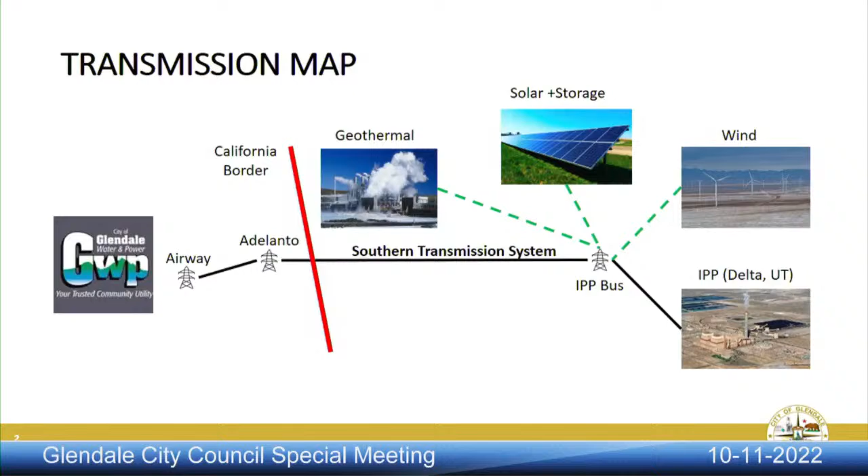So for that one, I believe we would still use the existing transmission line for Glendale. We will have that 55 megawatts, and not until 2027 would we have the full additional 72.

So that increased share we get, we don't really have access to until 2027. And then, I've read that the plans are that IPP is going from coal to gas, right?

It's coal today, they're going to gas, but 30% will be hydrogen. Is that still the plan? In 2025, are they going to be producing 30% of that energy using hydrogen? That is correct, that is still the plan and we're working towards it. There are a lot of hurdles, but that is still the plan.

Okay, that's what they're doing. We're not really directly part of that, right? Except that we're a purchaser, a shareholder. Yes, that is correct. Okay, but that's the plan.

And then one other thing on this is, so we get the Hoover Dam, we get a lot of power from that. Where is that coming into this picture? There's another line here, this is just the southern transmission system.

So we do have access to a different transmission system from LADWP that brings us power from Mead. That's like where the Hoover is connected to, so that's from Mead to Adelanto to Airway.

Okay, but don't we also call that the Southern Transmission System? Unfortunately, no. The Southern Transmission System is part of the IPP project, and IPP is basically the IPP generation, the STS, and the NTS portion of the Southwest AC, for shorthand, we sometimes just talk about the Southern Transmission System. Is the Southwest AC the whole thing, is that right? Yeah, I think that's correct.

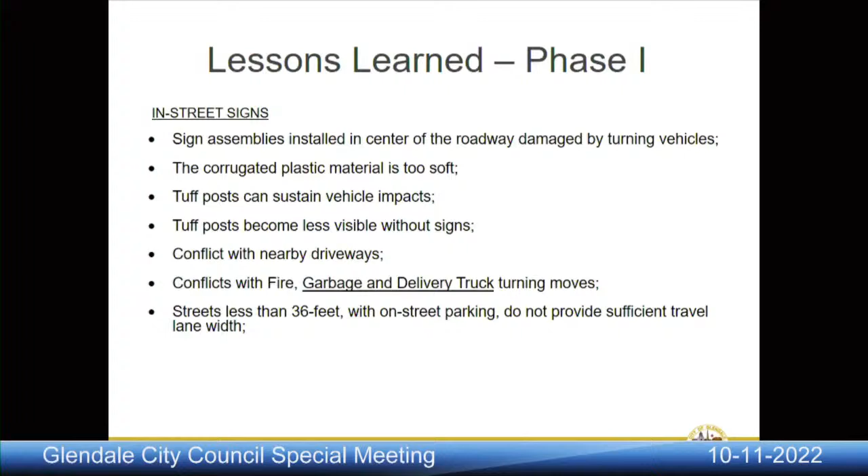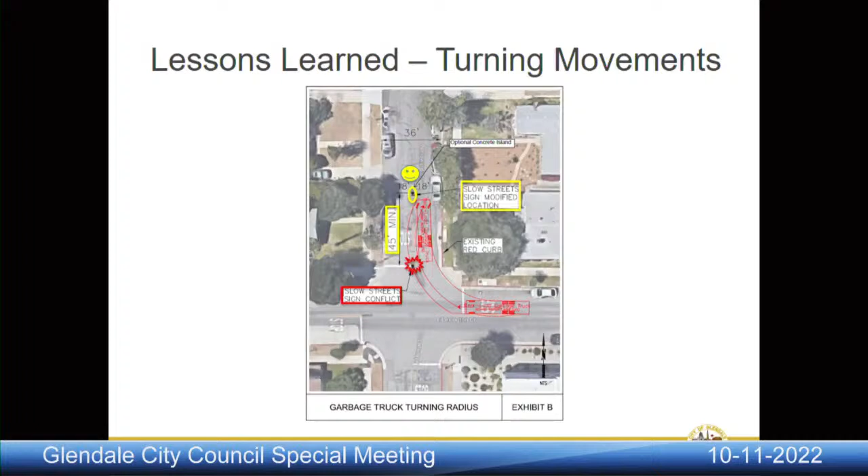Indicated in yellow would be the potential location to set that slow street sign assembly back, still in the center of the roadway, but pushed back far enough so that it's out of harm's way, which is why we see the happy face, as it's out of harm's way.

In consideration of the lessons learned and issues identified, staff has developed several recommended modifications. Some of these can be implemented within the current budget appropriation, and some require new additional budget appropriations. The modifications that can be implemented immediately include upgrading the sign material to a thicker, stronger styrene plastic, as well as installing the signs double-posted on each side of the tuff post, still along the center of the roadway. This stronger material would also allow us to install the signs 6 inches taller on the tuff post.

Also, in terms of the location of the sign assemblies, staff is recommending to set those assemblies further back in the street, as we saw from the turning template, so that the signs are physically out of harm's way of turning maneuvers for larger trucks, emergency trucks, and delivery trucks. In locating specific locations, staff will also be mindful of any nearby driveways and try to maintain a minimum distance from them.

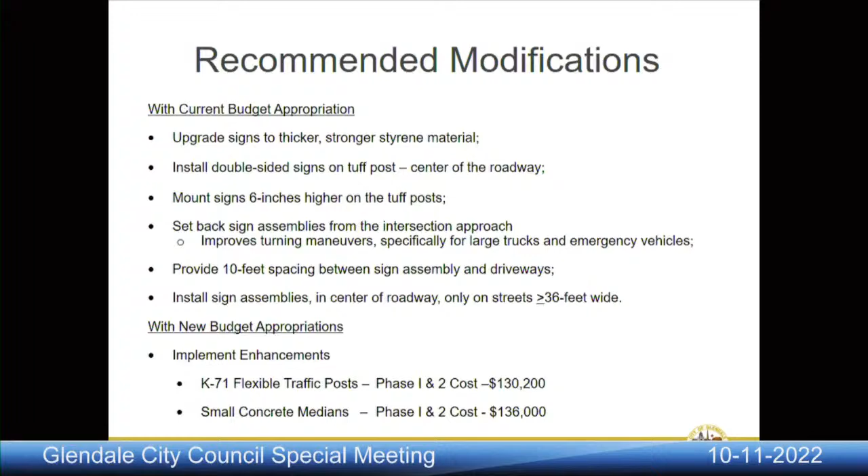The second option would require new budget appropriation, with two recommended enhancements: installation of K71 flexible traffic posts, and raised concrete medians along the middle of the roadway to complement the slow street sign assemblies. Rough order of magnitude costs for phase 1 and phase 2 are shown on the right.

In this slide, we'll go over this styrene material. The full term is polystyrene, a thick polystyrene plastic. Some characteristics are listed, and highlighted in a blue box are the predominant ones that caught staff's attention, as well as why the contractor recommended it: this material maintains its strength in high impact applications and is made out of recyclable material.

On the left side, you see two images. The lower left is a sign we may have seen in some locations, sometimes implemented together with mid-block crosswalks and uncontrolled crosswalks that say state law yield to pedestrians, made out of this styrene material. The upper left is the double posted option staff is recommending, placing these signs back to back on the post so they'll be visible to traffic coming from both directions.

Yes, Mr. Hines, I have a question. Does this part of the sign, the 'slow down' text, glow in the dark when lights shine on it? Is it more prominent at night? Yes, Mayor Pro Tem Najarian, members of the council, Councilmember Devine, that is correct. It's made out of reflective material, the same reflective material used on traffic signs you see on the roadside, used on the styrene. Okay, very good. Thank you. Sure.

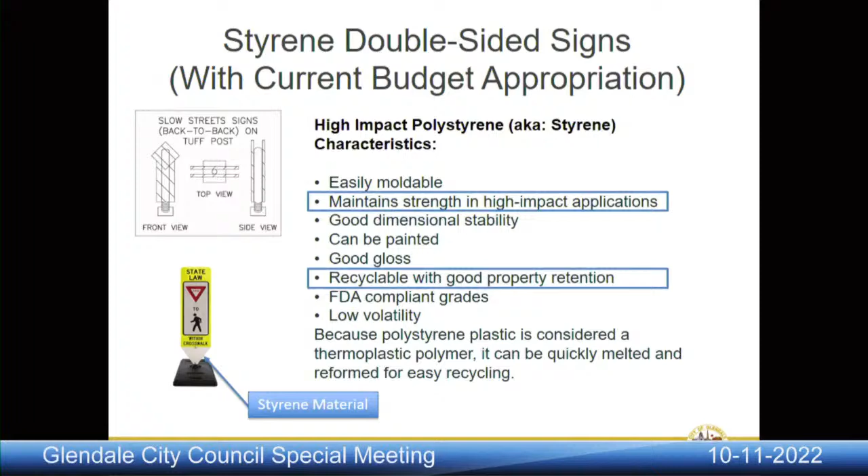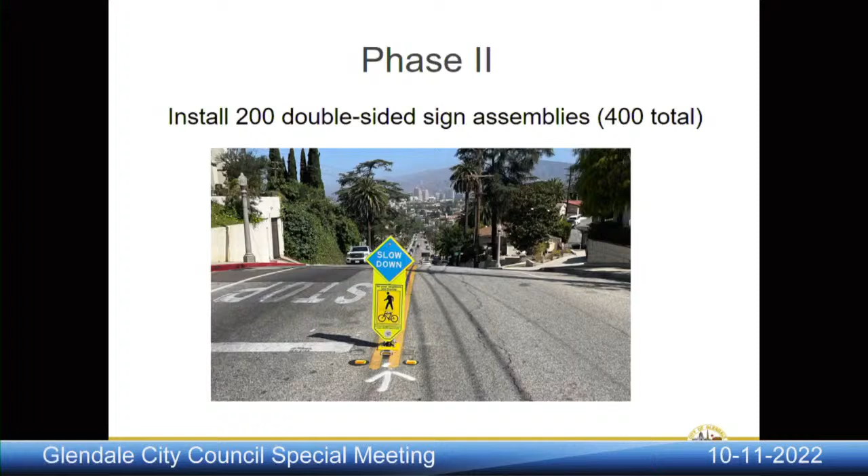In moving forward with the modifications, phase 1 would include replacement at 60 locations with the double-sided sign option, a total of 120 signs, using the styrene material. Phase 2 would include installation at up to 200 locations with double-sided styrene signs, a total of 400 signs since they're double posted. These phase 1 and phase 2 recommended modifications are within the current budget appropriation.

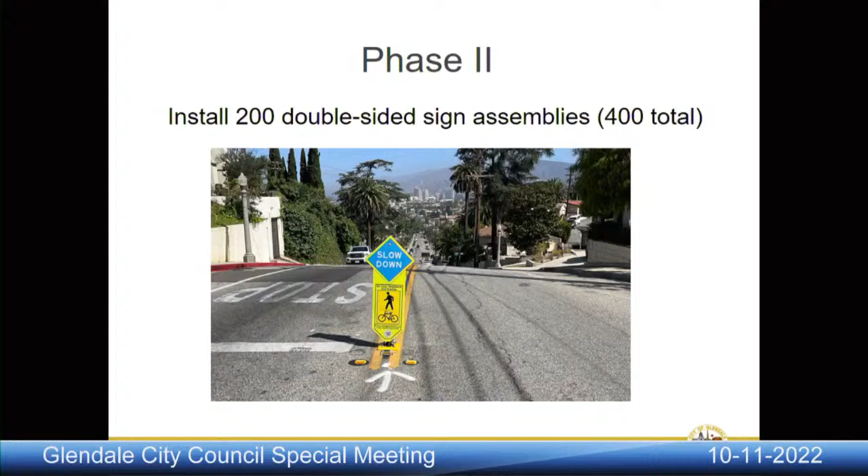So now we'll go to the options that are not within the current budget appropriation, staff's recommended enhancements: the K71 flexible traffic posts.

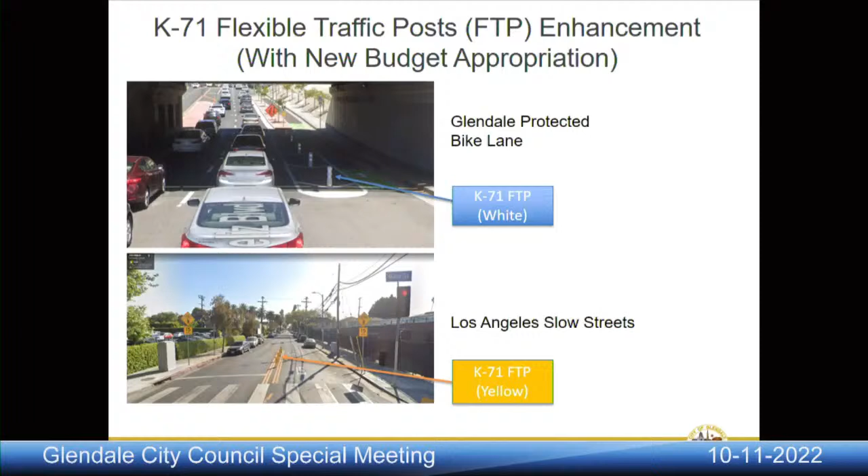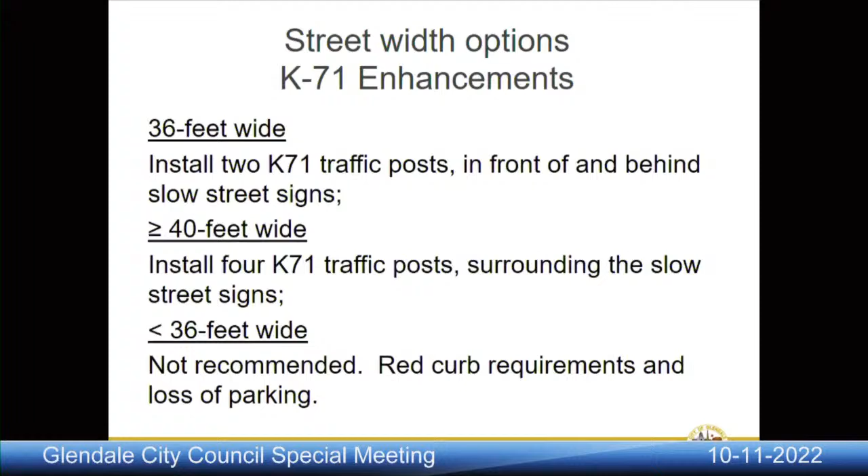In staff's recommendation for the use of K71 flexible traffic posts, there are two street widths that fit these enhancements. The first is for streets 36 feet wide, which would include installation of two K71 traffic posts, one in front and one behind the slow street signs. On streets 40 feet or wider, with more roadway space available, the K71 markers can be installed surrounding the slow street sign, one in front and back and on each side. Installing either the K71s or the slow streets on streets less than 36 feet wide is not recommended, as it would require red curb installations and loss of parking.

The other enhancement recommended by staff, which would also require new budget appropriation, is installation of a concrete median in the middle of the street along the double yellow to complement the slow street sign, with the K71 marker installed in front and in back. This installation would be reserved for streets 38 feet wide, and the concrete median would be approximately 2 feet wide.

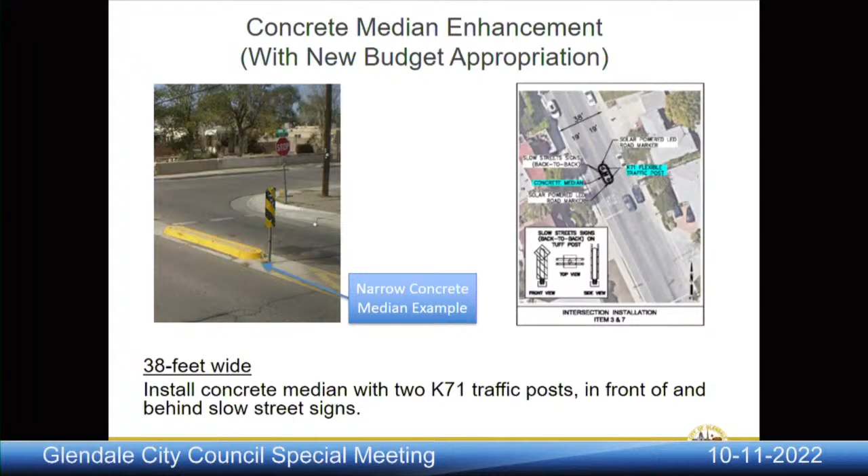In this case, a different type of sign is installed in front of it. Staff is recommending the K71s in front and behind, with the slow street sign on top in the middle. On the right is a schematic showing where this concrete median could be installed. The key takeaway is that the concrete median is set back from the stop bar to allow for turning maneuvers by larger vehicles.

It requires space, so the clearance area would still provide a very narrow entry point and potentially conflict with turning maneuvers for garbage trucks, fire trucks, et cetera. Also, if an errant vehicle or truck hits this hard enough, the signpost could get dislodged, creating a flying heavy projectile that can cause significant damage or even injury.

Also, with the additional width shown on this assembly, on streets narrower than 40 feet, it would require red curb and loss of parking. Lastly, the cost of this implementation is higher because of the signposts and the removal and installation of striping and red curb markings.

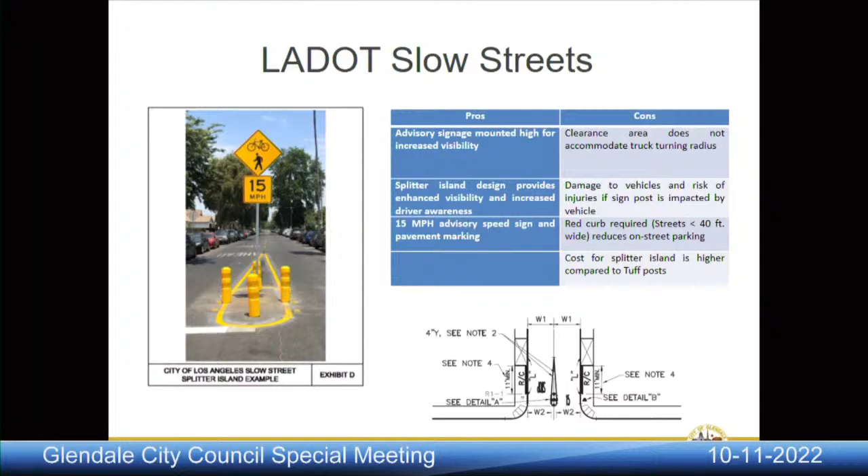In closing, staff assessed the phase one installations and lessons learned, and developed recommended modifications—some within the current budget appropriation, and some enhancements requiring new budget appropriation. Within the current budget would be the styrene signs and implementing double posting, or back-to-back installations, for both phase one and phase two.

Within the enhancements requiring new budget appropriation would be the two options we saw with the K71 markers with two and four posts, as well as installation of the concrete median. These would require additional budget appropriation for both phase one and phase two.

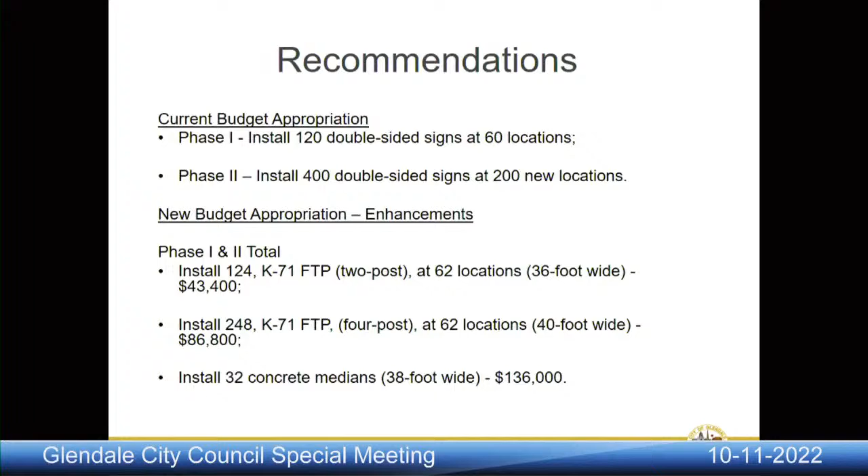And with that, that concludes the presentation, and we'd be glad to answer any questions. Any questions, Ms. Devine?

I still have a concern on one of your photos, showing Lexington, for example, where you move the signs back away from the intersection. If you take Lexington, Geneva, Jackson—cars are parked on both sides of the street. Right now, if you put something in the middle, whether at the intersection or further back, cars already have to move over, hopefully to an empty spot. We don't have room to get through two cars. So if you put one of these in that location, have you looked at that? Or are those streets already taken out of the equation?

They will not have these signs on them. Councilmember Devine, it's staff's recommendation to implement these slow street signs in the middle of the street on streets that are 36 feet wide or greater. In those cases, parking would still maintain a minimum 10-foot travel lane for vehicles on each side of the slow street sign. So you've taken the parked cars into consideration when figuring the amount of space you have for the sign? Councilmember Devine, that is correct.